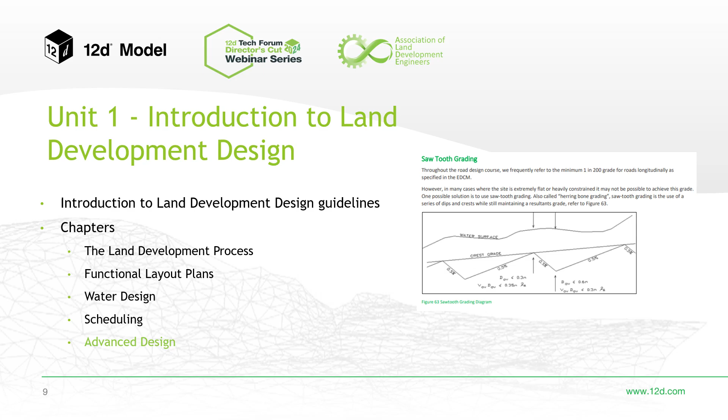Okay, so that's Unit 1. I'll show you the actual document so you can see everything that's included in that after I've run through this summary.

Next into Unit 2, the road and finished surface design unit. The first chapter is the survey preparation chapter. I've put in brackets the number of lessons in each chapter so you can see how much we cover—this chapter has 7 lessons.

It covers importing the feature survey data, triangulating it, producing contours, sharing the data—so creating a design project—and then importing the plan of subdivision so that we can begin the design.

So this is the site here—it's a real project in Warragul, with 82 lots. We have an existing development to the south and private property to the north. It's big enough and has enough roads for us to cover a lot of the different design situations we do, and it's also quite interesting with the grading requirements as well.

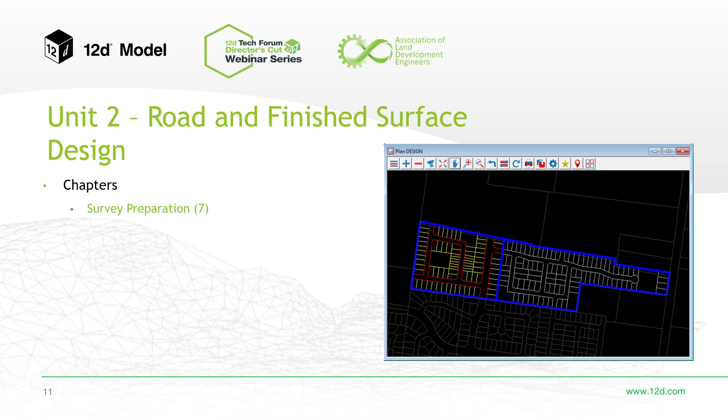Then the next chapter is a big one, the MTF chapter. Here we create an MTF, apply it, remove links using modifiers, create a parking bay, grade our intersection, and those are just a few of the options we show. There are 15 lessons in that one, so there's a lot to cover in the MTF.

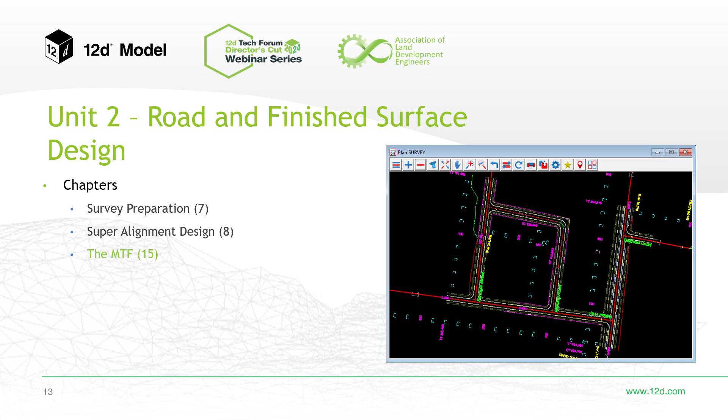Next, stormwater coordination and lot grading. Here we coordinate with the third unit, which is for stormwater design. Once we've done our initial lot grading, which is at the end of the MTF chapter, we hand our design over to the stormwater designer, and they conduct the stormwater design. This course actually replicates that process of going back and forth with the stormwater designer to achieve a compliant overall design, including freeboard creation and lot grading and things like that. After this chapter, we've essentially got a completed, finished surface design.

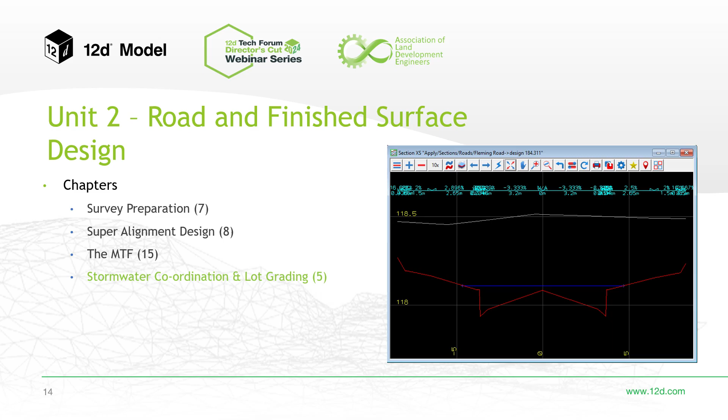We then have the element method chapter, which shows how to create our super alignment horizontal and vertical geometry using the element method as opposed to the IP method, which we used in the super alignment design chapter earlier.

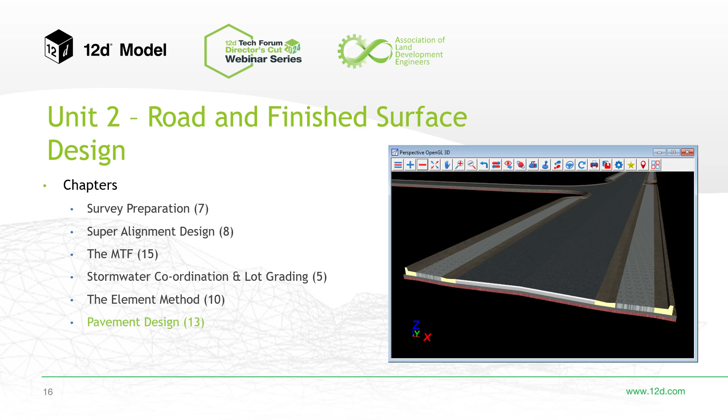Next we have pavement design. This is another big one because there's a lot of new tools in version 15 of 12D model which we want to show off. We show how to create pavement tri-meshes for our roads, footpaths and curb returns, and then ultimately create our subgrade TIN and perform the volumetric analysis.

Then we have the last chapter of this unit, the outputs and plotting chapter. This covers all the outputs you'll need from 12D for your plans—your pavement contours, fill boundaries, lot surface levels, chainage labels, curb setouts, and your plots, so your cross section and long section plots. And that completes Unit 2.

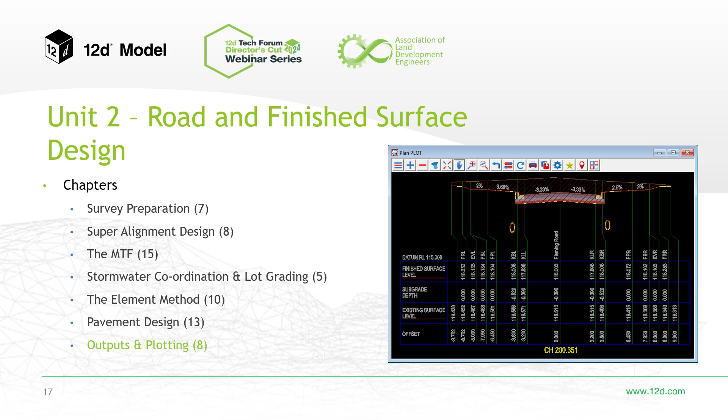Then in the third unit for stormwater design, the first chapter is stormwater plan layout. So in this chapter, Rob Graham from 12D goes over the placement of the stormwater network and the tools in 12D that allow you to place your pits and pipes in the correct location, both in the street and also in easements.

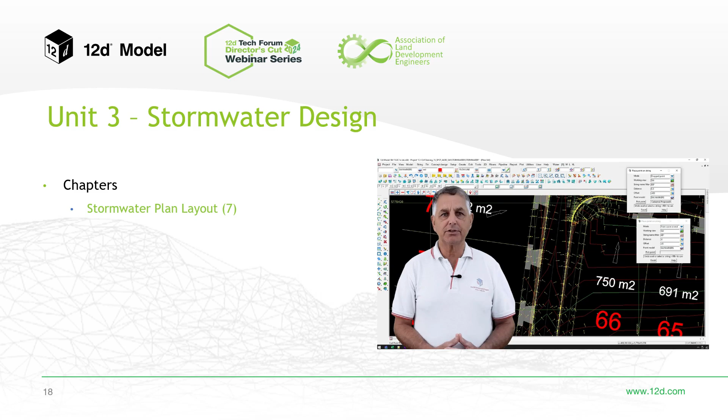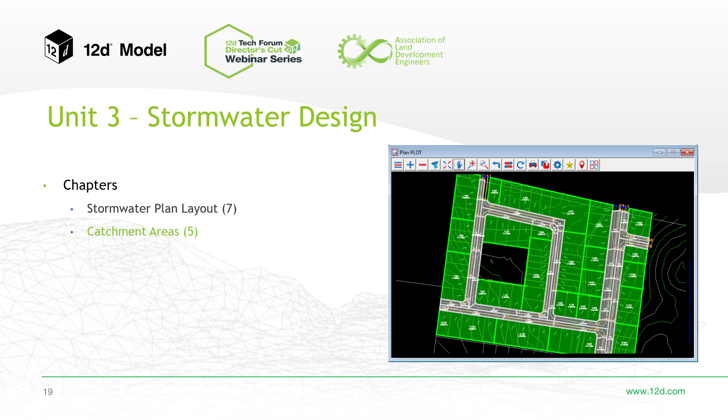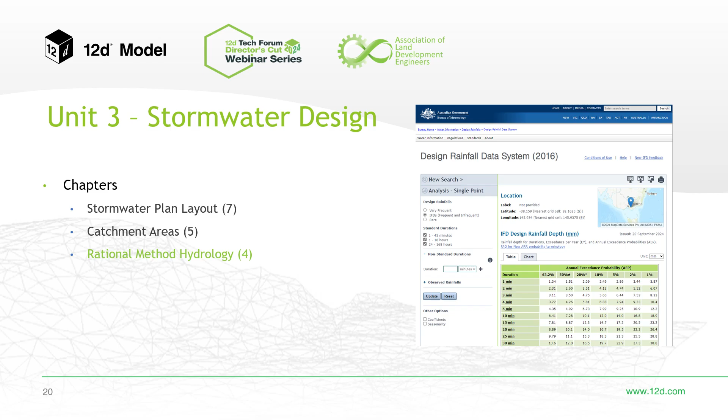In the next catchment areas chapter, it's all about creating street catchments and lot catchments, and then ultimately linking those catchments to your pits. In the rational method hydrology chapter, we then collect our rainfall data, calculate our runoff coefficients and times of concentrations, and then ultimately run the rational method analysis.

Next, in pipe grading and sizing, we actually give the pipes the relevant cover and grade and drops through pits. We calculate pipe losses, pit losses, and then ultimately using all that, we size the pipe network.

In services, we then consider the other utilities or services within the road. So where are the water, the electrical, the comms? Where are they sitting in the road and how do they affect each other? And then ultimately, how do they affect the depth required of the stormwater network?

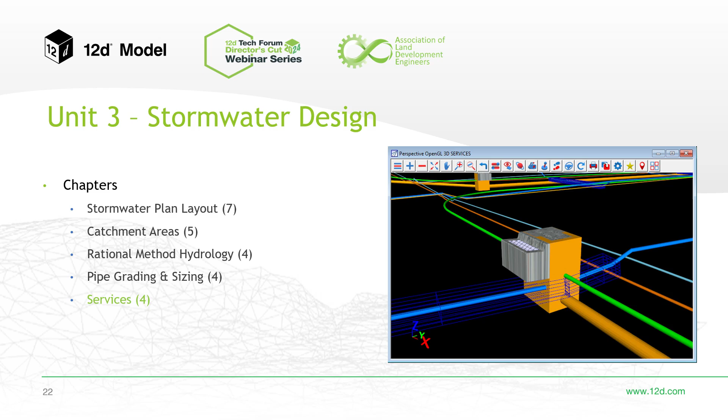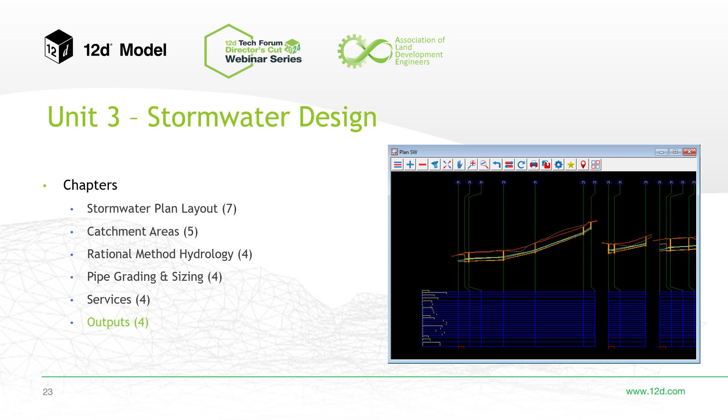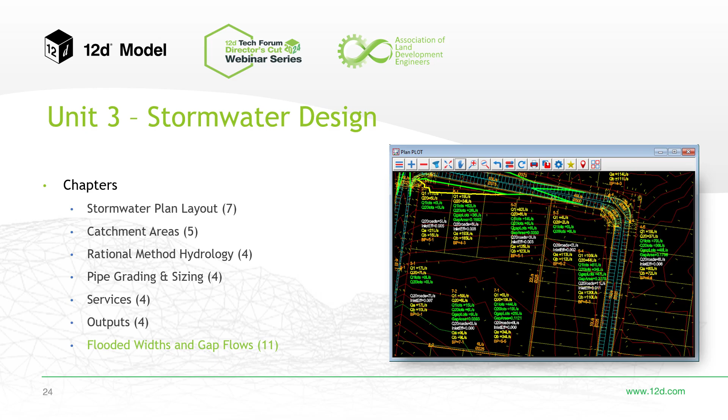All right, and then the last chapter of this unit is flooded widths and gap flows. So this is where Rob covers stormwater design for major events, considering gap flows, where the water is backing up at any sag locations and overtopping the crests of the road. So Rob does all the necessary modeling and analysis for that in 12D. And that is Unit 3. So that brings me to the end of my elevator pitch.

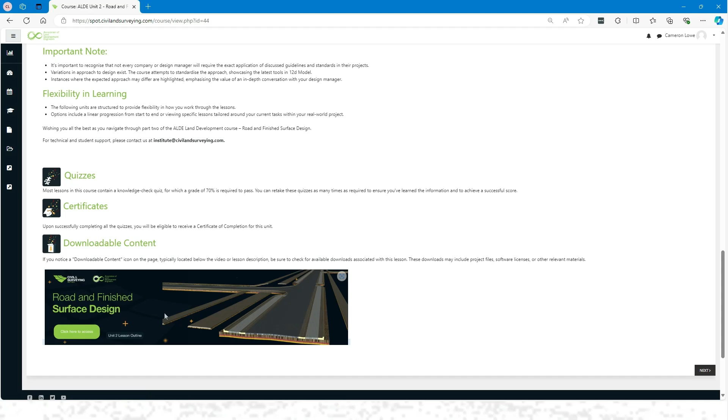And then also in this Spot tools lesson, within this overview lesson at the very bottom here, there's another banner that you can select. That'll open a document that details all the chapters and, importantly, all the individual lessons within each chapter, and then also the individual topics within each lesson.

So the first lesson of the first survey preparation chapter is this Import Survey Data lesson. The individual topics in that lesson are shown here, as well as the timestamps. This helps if there's a specific topic you want to review - you can search this document, find the relevant lesson and the relevant time in the lesson, and easily navigate to it.

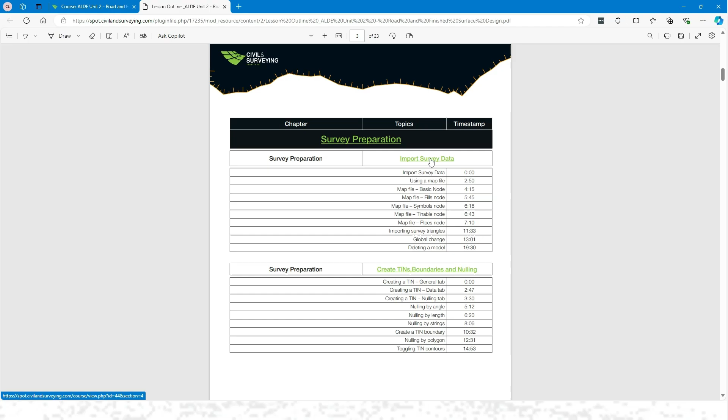Each of these headings here is a link. So if we pick that Import Survey Data link there, you'll see that it will take us to that lesson within the unit.

This survey preparation chapter is all about importing the feature survey data, creating a TIN, creating contours, sharing the data to a design project that we create, and then importing the plan of subdivision before we review what's required of the functional and detailed design submissions.

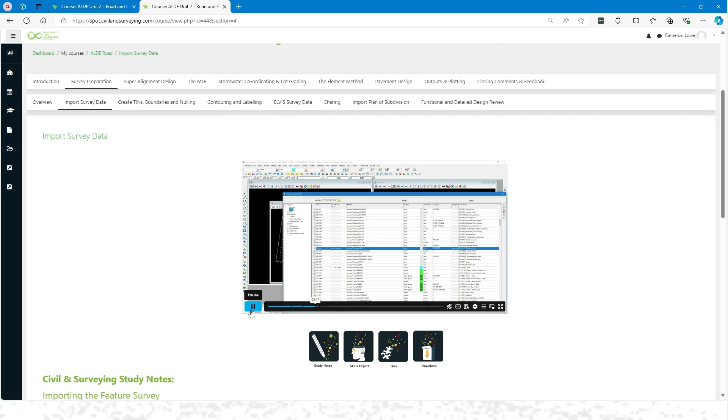Going back to that document we just saw, within each video there is this chapters button, which has all the individual topics within the lesson, the same as from that document we saw just before. You can pick them from there and you'll be taken to that point in the video. So it's all really easy to navigate and get around to what you need to see.

Then in the next Super Alignment Design chapter, this is where we cover horizontal and vertical geometry creation of our super alignments, using the IP method. You can see the names of the lessons there.

These are the names of the roads in the development, and we've got a lesson for each of those because we use various different super alignment tools to create the geometry for those road center lines.

In the MTF chapter, as I said before, this is quite a big one - there's a lot to go over in the MTF. So templates, creating an MTF, applying the MTF, things like seed MTF files, chainage aliases, parking bay creation, special chainage files, intersection pavement grading. Importantly, I want to stress that it's not just the basics in this course - there's things in here that even experienced 12D Model users will get a lot from or learn new things from.

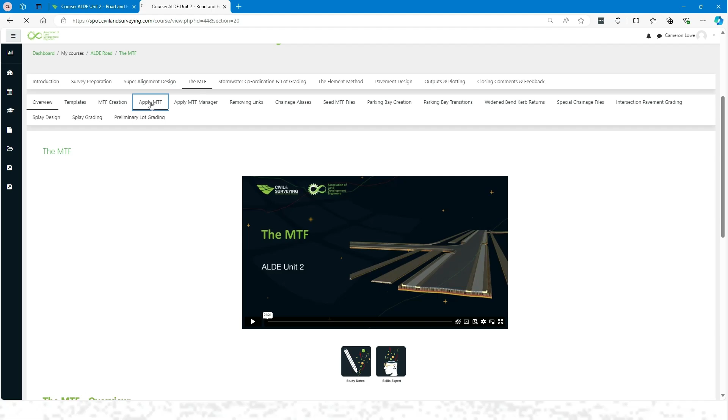Now, if you haven't seen the Spot platform before or don't know how the lessons look, if we go into one of these lessons, the Apply MTF lesson is a good example that I like to use.

If I just play the video here, you'll see there's a quick introduction. This is the unit that I teach, so that's me. But then I will disappear.

After a quick introduction, we then begin in 12D, and it happens pretty quickly in this lesson, which is why I use it. Ultimately within each of the lessons, we get to a point where we're not doing anything on the screen and perhaps we're just explaining how something works or clarifying some information. You'll see there, I'll pop up and give some context as to why we're doing what we're doing, or just give some extra information. This is really to try and improve engagement and make the videos a little bit easier to watch, because we know you'll potentially be watching quite a few lessons in one sitting, and we want to keep you engaged. But you'll see there, I'll then disappear and we continue on in 12D. That's generally how the lessons run and how the content is delivered.

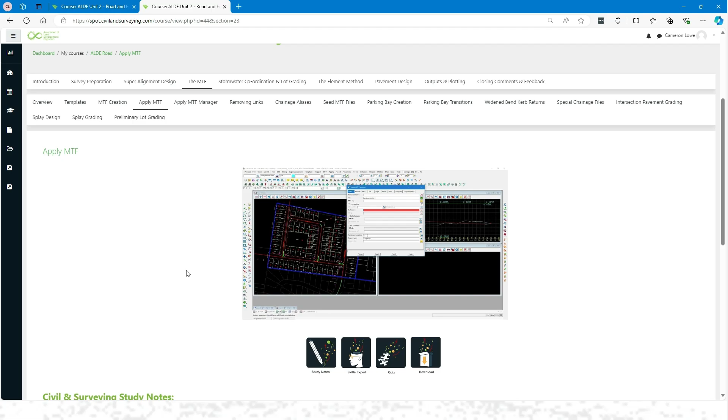Once you've completed the video or the lesson, each lesson also has a quiz, which is at the bottom of the page here. So you can enter the quiz for this one. We've got some multi-choice and true-false questions. These quizzes that we've set up are knowledge check quizzes, so you can attempt them as many times as you want, because with these, we really just want to ensure you're picking up on the main ideas from the lessons. We're not trying to stump you or confuse you here. We just want to reinforce what to take away from the lessons.

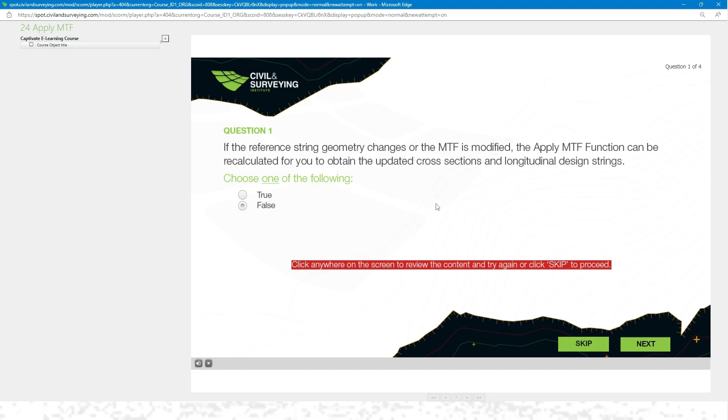I'll just start the quiz here. And I guess to demonstrate this, if I do get this question wrong, say false, we get the red line here. And what you're able to do is click on the screen here, and the lesson will begin from where that question is answered. So you can watch that part of the lesson again, and once you've maybe realized your mistake, you can return to the quiz and continue on with it. It's the completion of each of these quizzes that ultimately leads to you receiving your certificate of completion for the course. So that is how we control course completion. And that's the quizzes, so I'll just jump out of that.

Continuing on with our chapters, again going over this quickly just so you can see the names of each of the lessons. The next one is Stormwater Coordination and Lot Grading. Once we've done our initial lot grading, which is done at the end of the previous chapter, we then hand our road and lot design over to the stormwater designer. They'll conduct the stormwater design with that design, then get back to us as a road designer with the changes that need to be made.

This chapter covers the nature strip crossfall, so increasing the grade of the nature strip, the creation of batters into the lots for freeboard, and then we cover a few different methods for lot grading. After this chapter, we've essentially got a completed, finished surface design.

We then have the element method chapter, and this one shows how to create our super alignment horizontal and vertical geometry using the element method. The aim of this chapter is to showcase some advanced tools like setting up string references, computators and chains, so all those things that can really speed up your design and particularly your design amendments.